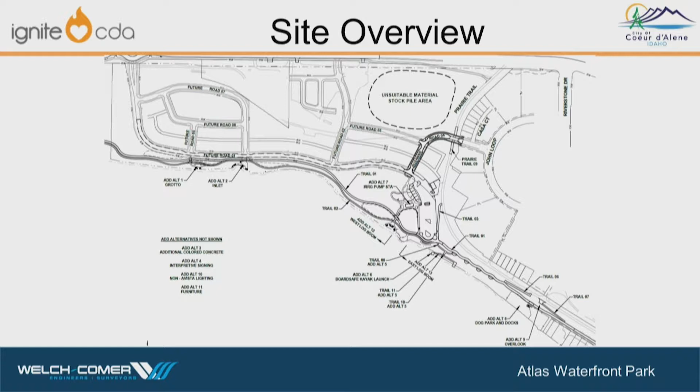We're hopeful that when we're bidding this, we'll attract lots of contractors and see a lot of positive bid results on it. But if we don't, we want council to be in the position to work with Ignite and award a project that fits within your budget, which might mean making some tough calls. We might not be able to afford the dog park, or you might have to make some other choices that will be tough. But we wanted you to have that ability to move the project forward.

Is the project portioned out as far as costs, or are you going to just do that if that happens? So if it's like you come to us and say, hey, the bids came in and they're way high, so you got to cut something out, do you know what the pieces cost?

Yes, each one of those alternates will have a price tag to it. So you'll be able to award a project that fits within your budget, or you may say, gosh, we love it all, Ignite doesn't have enough money, so let's go get some money out of Parks and Rec. I'm not saying you would say that, but that might be one of the choices you'll be faced with making, because all of these features are probably considered needs from some element of your community. So it will be a tough choice, but that's why you're up there.

Thanks. Phil, can you just go back to that other map for a quick second? So you said this is how it's going to start. It's not going to start with the road coming in and the development. It's going to start on the waterfront.

It's starting on the waterfront, for a couple of reasons. One, that obviously has the most public value to the community. The second reason is, once the developers see that the park is real, and see the quality of it and the amenity that it will be, it drives up the value of the dirt, the land that's for sale.

One of the things I wanted to talk a little bit about, because it's evolved since we first started, is the restroom facility—and we can't even really call it a restroom facility, so we gave it a new name. We called it a recreation support building, because we couldn't think of any other name. But that is the recreation support building, which houses a number of uses. One, it houses the restroom. Two, it's a picnic shelter. Three, it has an irrigation pump station in it to draw water out of the Spokane River to irrigate the park. And fourth, there's a storage area over here that could be used for some other potential uses in the future. But it was a part of the building that just kind of lent itself to having some space in there.

Right in this area here, you'll see another setback—I'll show you a plan view of it. It's where you currently shut the restrooms down in the wintertime, but you still need to provide facilities there. So Bill Greenwood cleverly came up with the idea of finding a place to slip the porta potty in, kind of in a nice location. So that area will accept an ADA porta potty for wintertime use.

You can see the theme of the building is obviously mill style. This is the view looking at the picnic shelter. This is another view of the picnic shelter, much taller structure, open, nice feeling to it.

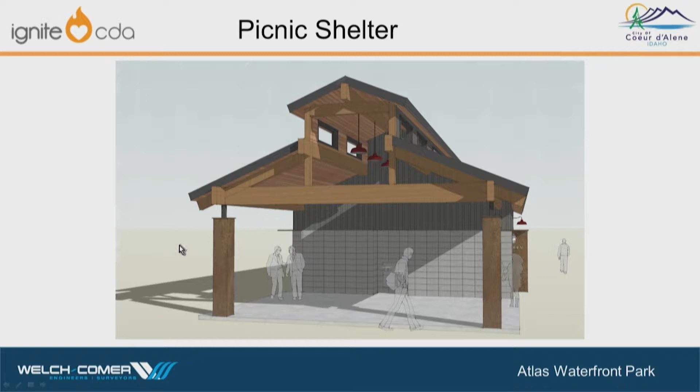Phil, is the design of the support building based on anything historical, or from the mill? The look of that building actually came from pictures that Bernardo Wills Architects used from some of the original mill structures. That theme is consistent with the clerestory element up here in the buildings that used to be used for ventilation and light.

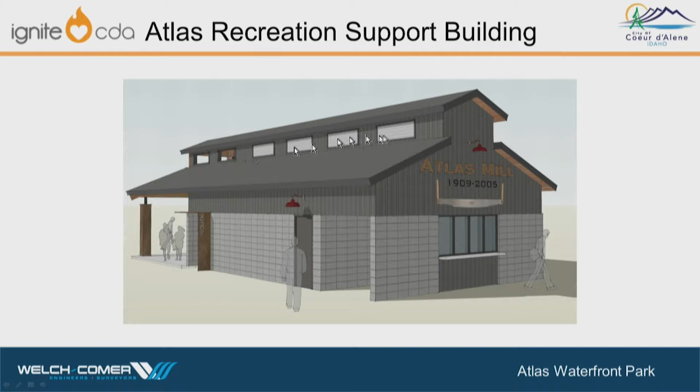And so here you can see there's nothing in it, these are vents in this section of it. Nice, thank you.

This is just the east elevation of the building, and here's the plan view.

The reason I show this is the building originally started out with two toilets on the women's side and a urinal and a toilet on the other side. As we worked through the design process and Bill Greenwood really got into it and was experiencing what's happening at Memorial, it went to 3. Then as we continued looking at the uses that might happen down here, it went from 3 to 4. Obviously that has a cost associated with it.

So this is going to drive the project cost up. When we originally estimated the project, we put contingencies in there because it's so early in the process - you have to have a contingency. We've probably burned through a good portion of the contingency making this a bigger facility, but as Bill pointed out, you do these once, you don't have another opportunity to do the restrooms correctly. So Bill was pretty adamant that we take it to this size.

This is the picnic shelter portion, and you can see what looks like a tremendous amount of piping in here, because it's the facility that draws water out of the Spokane River and pumps it into the irrigation system. I won't get into the details, but the whole purpose is you have a water right that Terry Pickel is securing. It's cheaper than buying water from Terry Pickel for the Parks Department, so at this time it makes sense to make the investment there.

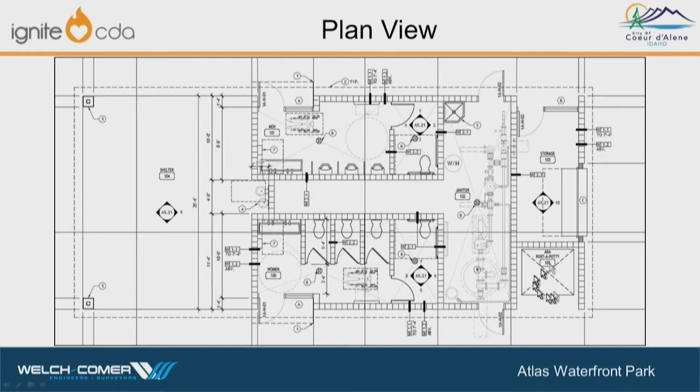Here's the storage room I mentioned, and then this is the ADA restroom area.

The other facility that will be here is the maintenance storage facility. Bill has the option of dragging all his toys with him to the park from elsewhere in the city, or if he could keep them here, it's more efficient for his crew to go there, get the toys out, and go maintain the park.

Pretty simple structure, it's a pole building, 30 by 50. It started bigger, and Bill kept shrinking it down to try to help offset some of the additions he was making in the restroom facility.

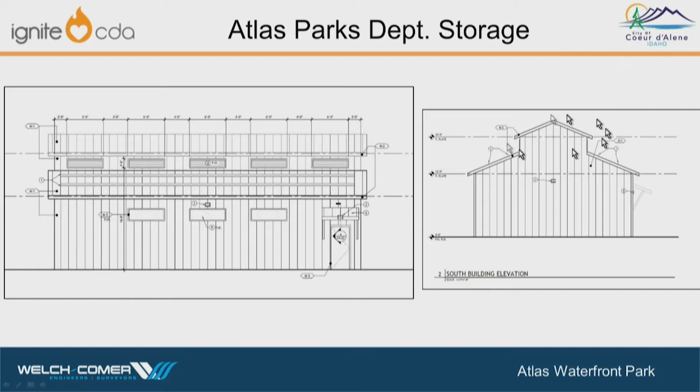Literally, it's a pole building with a flat slab on the inside of it, so it's as vanilla as they come. A little bit of architectural interest there because it does front out towards the view you'll see as you come into here, and it's in a neighborhood, so putting a really ugly building wasn't appropriate for the rest of the development.

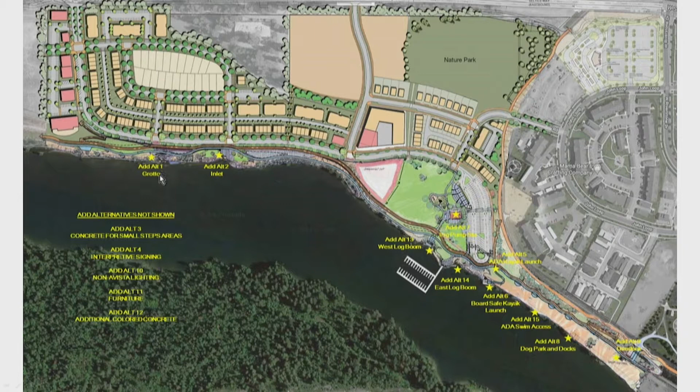This is just another view of the add alternates that might be a little easier to see. We had to name these things, and this one kind of feels like a grotto. This is a water access down here, and this is the inlet where they used to actually pull logs out.

And you can see all these different add alternates in here. When we open up the bids, you'll see pricing for each one of those. We'll have a total, and then you'll be faced with the tough choices - hopefully not. Maybe the bids will come in great and we'll be super pleased with it, which would be wonderful, and we'll just award everything.

Schedule-wise, this is a pretty detailed schedule because it has a lot of stuff we need to do with Renata. You guys know the ship that Renata runs is very tight, so we have to make sure we have things that say staff report to Renata and all these good things, and we're trying to make sure we're on task. We'll advertise on the 27th, advertise on the 29th, and then open bids on the 24th of September.

Tony and I talked about how do you deal with this situation where council is going to award the project, but Ignite's providing the funding. How does Ignite provide input to council? So the idea was to have Tony hold a special call meeting with his board on the 30th of September or the 1st of October, and then they could provide some input to council, at least the Ignite board's thoughts, before you all get ready to take action on it.

And then the other key component is Bill Greenwood will have the opportunity to talk to the Ignite board, because Bill is chairing your Parks and Rec Commission. From the early onset, the mayor had said that's really who should be driving this bus, because that's where they live, is in the Parks and Rec world, and advising council. We'll move into notice to proceed.

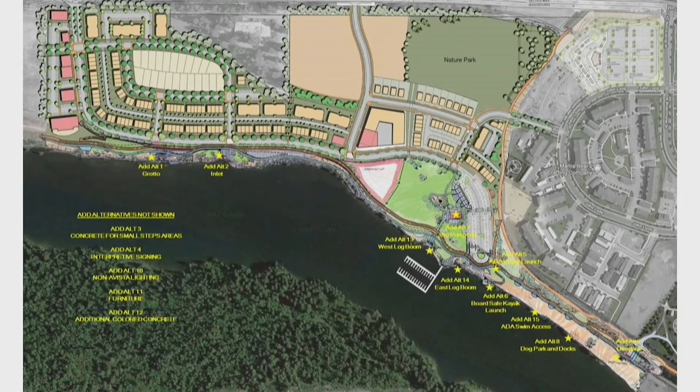So just housekeeping, remind me: when the bids are open and the low bid is the base bid, does the low bid plus the total of the chosen add alternate still have to be the low bid? That's a question I'm going to work through with that gentleman over there.

That's going to be important to know before we get into this discussion. Honestly, in all the different cities I work with, different city attorneys interpret that differently. It boils down to, we have a philosophy on how we think it should be done, but different city attorneys seem to give me different direction on it.

So that's one of the things we'll talk to Mike about. I think a lot of it is how you write your specs or write the bid process. If you alert people to how we're going to work through that, then they know that's the rules. That's why it gets problematic if you haven't really set out any rules, and then you go, oh boy.

So we put the language in the bids about what the basis of award will be, but we'll work through it with Mike and his team to make sure it fits their objectives and requirements.